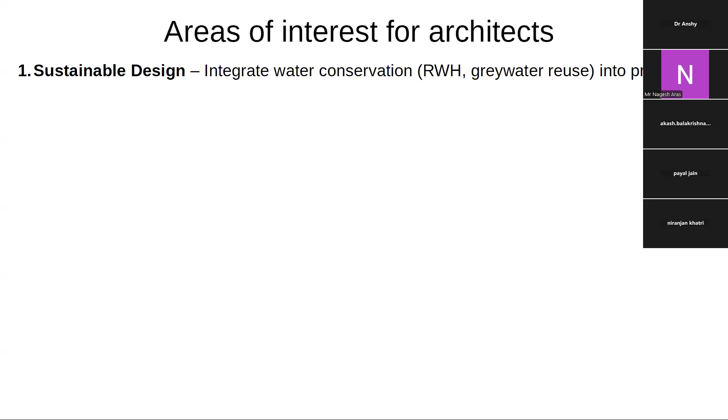The first thing we are going to talk about is sustainable design. That is, integrating water conservation, rainwater harvesting, and grey water reuse into new projects—building projects or built environment projects. I do not know whether chemical engineers get that type of chance in the professional field, but it's something to think about.

Another one is urban resilience, that is, planning buildings and cities to handle floods, droughts, and climate risks.

Third is policy awareness—this certainly applies to everybody—understanding water laws shaping construction and infrastructure. Fourth is systems thinking: linking architecture with engineering, ecology, and governance.

Fifth is community focus. This also applies to chemical engineers, and that is designing with local water needs and stakeholder inputs. There are about 13, 14 stakeholders. We'll see who they are, and we have to keep them in the picture. So when we as engineers think about solutions, those solutions may not be acceptable to one or more stakeholder categories. So we have to take them on board, sell the idea, and make that work along with the community.

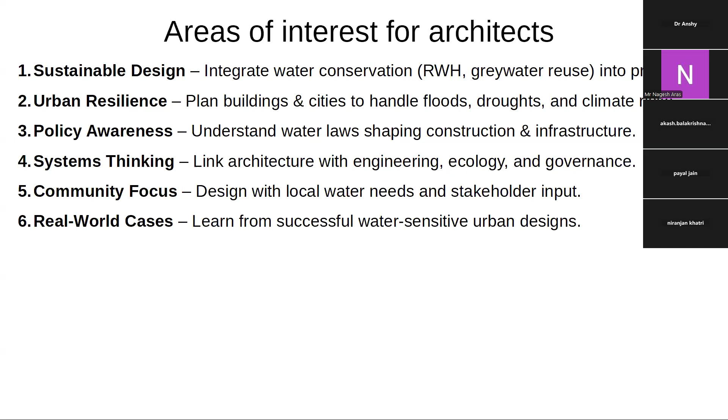And the last point is real world cases—learning from whatever is going on around the world as successful water sensitive urban designs. So this was my plan to run. Let us see how we can change it as the need arises.

So first we see water sustainability at the city level. What do we mean by that?

First point is stormwater and flood management. Both are different—stormwater is normal water disposal, and flood management means there are floodplains in any natural terrain, and we have to deal with those floods. So runoff water we have to handle, along with flood prevention and mitigation. Third point is large scale retention and detention systems.

That also becomes one of the topics—sustainable drainage system deployment. Okay, so this is one of the agendas of what we have to do in stormwater and flood management.

Then water quality and ecosystem health—I believe this audience particularly may be interested in this topic more. That is water quality improvement via bioremediation or even chemical remediation, constructed wetlands, natural wetlands, and bioretention systems, and biodiversity enhancement via water ecosystems.

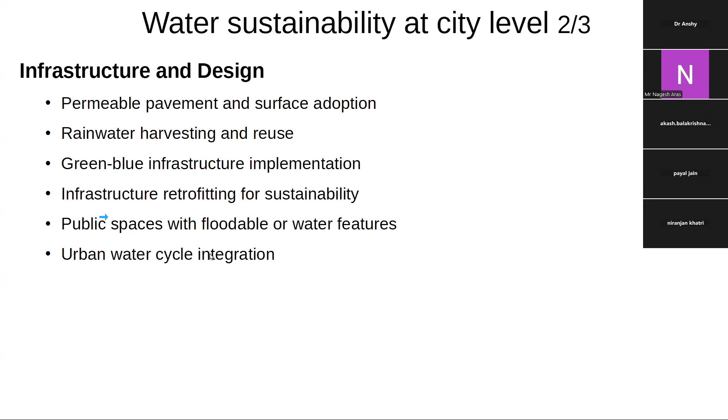That means some parks are designed intentionally lower than the surrounding areas so that they can be flooded during a flood situation, but the park will not be damaged because of that. That is called a floodable park. And urban water cycle integration.

And finally, climate and environmental adaptation. Our city is participating in a multinational initiative on climate change, so we can play a part in that. Although the city administration has not invited public participation, we can take initiative and get involved. So one thing is urban heat island mitigation through water features.

Just an aside—IISc conducted an experiment where they flew drones across Bangalore in different directions, and they found that wherever there are lakes, the temperature actually drops up to 5 degrees Celsius. So this is the impact of water bodies, and that's what we're talking about with climate adaptation and resilience planning.

And finally, policy, planning and community—that is water sensitive urban design frameworks, policy driven water absorption initiatives, and integration of water with urban planning. Because right now we do not have an urban plan in the sense of a land use plan or land use policy. So we should be talking about a land use policy which treats water bodies as core elements that we have to protect and respect. I will come to that in a later part of the presentation.

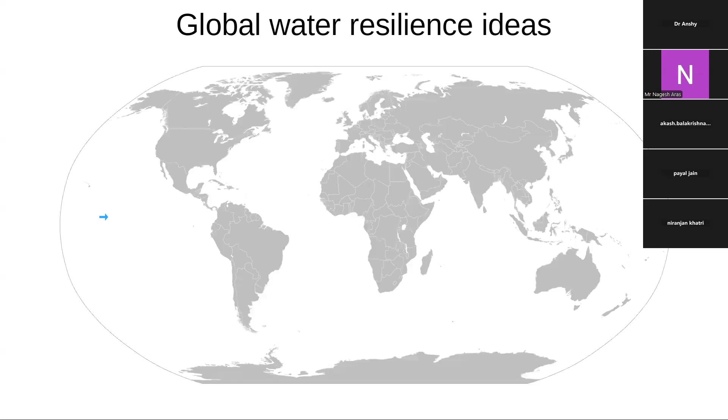Globally, there are multiple ideas. One is in the US and North America, that is US and Canada, called LID - we'll come to the full form. Here in Europe, there is SUDS, water sensitive urban design, and green and blue infrastructure. In China, there is the idea of sponge city. And in Australia, again the WSUD, which is common between Europe and Australia.

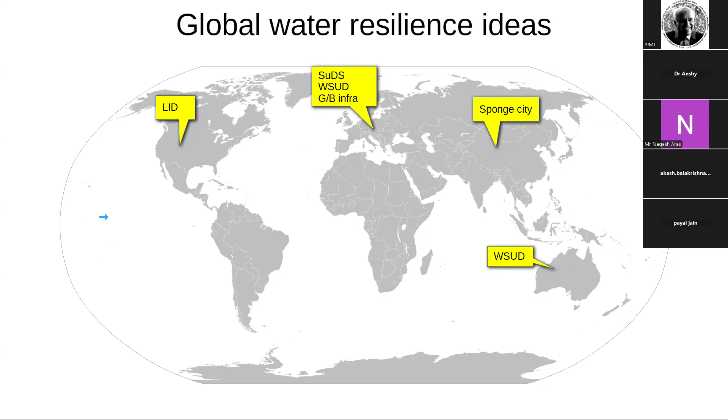These are the main ideas going around the world. I will give an overview of these ideas, what they are, and a comparative analysis. Then I will talk about what is happening in India and in Indian cities in particular.

First of all, we have to see how these water resilience approaches operate vis-a-vis scale. I will list the approach and compare them at different scales. The scale ranges from plot to locality to city to region to country.

Now, what are the design elements which actually go into these approaches? There are many overlaps, but let us see what design elements go into that. I will talk about each design element.

We categorize them into infiltration, that means water taken to the ground; retention, that means water is held for a certain time before letting it go; vegetation based, where vegetation is allowed to grow; and storage of water or ecological enhancement of lakes and other water bodies. These are the categories.

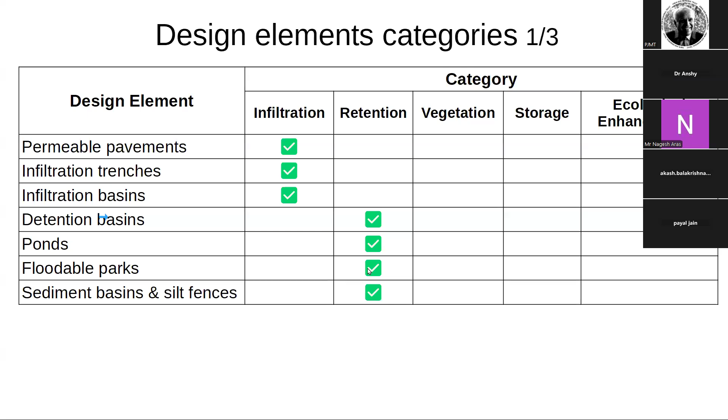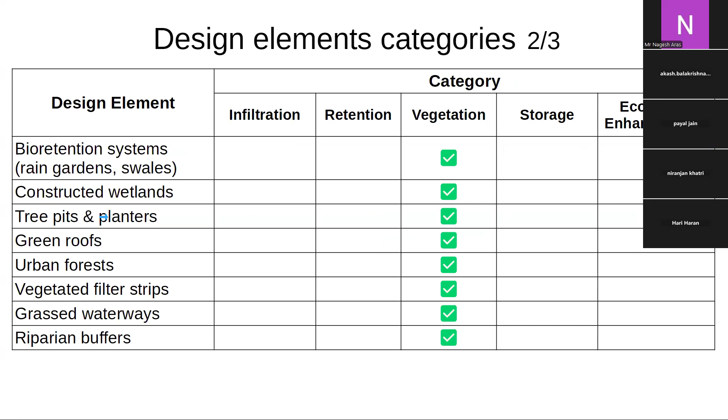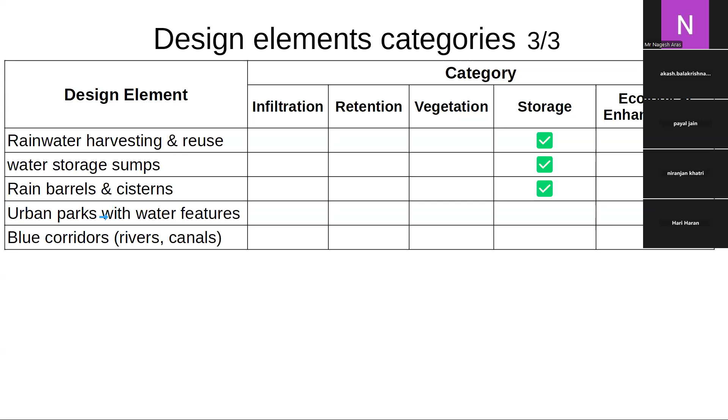The third category is storage and ecological enhancement. Storage is rainwater harvesting and reuse, water storage sumps, rain barrels and cisterns. Urban parks with water features and blue corridors - that is rivers, canals, drains, major rajakaluves - all that goes into ecological enhancement. So these are the categories of different elements used in the initiatives we talked about.

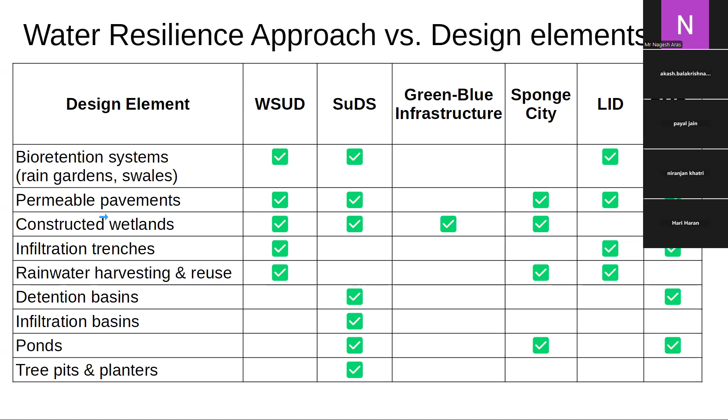I will not be talking about the details because the audience is chemical engineers, not architects, so I will skip the details about this.

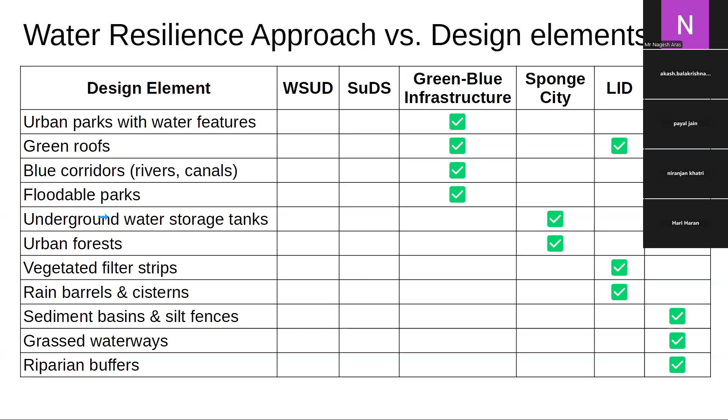Now we talk about water resilience in Indian cities, because we are not following any of those approaches per se. We have our own method, or rather it is in the nascent stage. So we have to talk about setting up these approaches and following our own method, which resonates with our people, our cultures, and our cities, whatever unique needs we have.

The outline of this part is: we will first define the water system as applicable to a city, then talk about problems in our water system, then root causes of these problems, then solutions, and finally the required governance system.

Finding solutions and talking about solutions is not enough. We need a governance system which involves both the government and the public. Together we run the system, we cooperate - government and public. Public also involves businesses, industries, everybody. And then we maintain that system. So that is the basic idea about it.

So the first part is to define the water system as applicable to Indian cities. We talk about water system assets. So far, nobody talked about assets because it was not thought about as different assets. So what are the different assets which are components of our water infrastructure in the city?

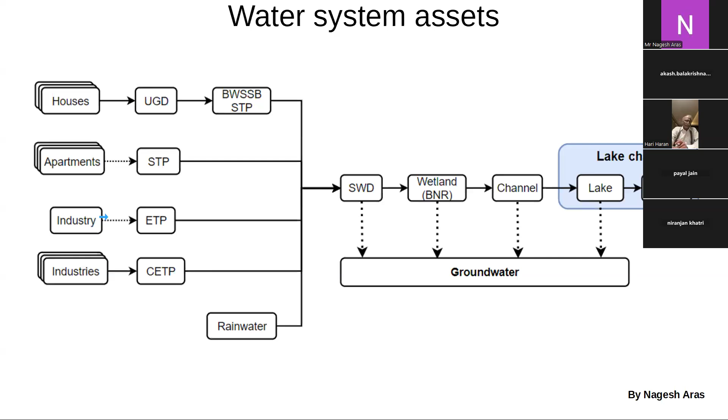No, sir, no comments at this stage. Yeah, please carry on. It's very interesting. Okay, thanks. Go ahead then.

So, coming to lakes. Why are we talking about lakes? This was primarily based on Bangalore, because in Bangalore we have many lakes and we do not have a river. But in cities like Mumbai, Chennai, and other places, there are only one or two rivers in the city, and the remaining city also has lakes. So it is relevant to talk about lakes in a separate category.

Lakes can be controlled and looked after by the surrounding community. They have different dynamics compared to a river, which primarily flows through the city, coming from outside and going outside the city. So it is not seen as a complete asset belonging to the city itself. There is less public support in controlling the health of a river compared to a lake, which is seen as a local asset or local property. I will just highlight this; you may apply it to rivers also, but this is the focus here.

Traditionally, a lake was seen as a single unit. We normally take a lake as just a lake—what is there to see? But there are almost 36 or 39 different assets in a lake, which can be divided into 3 specific zones.

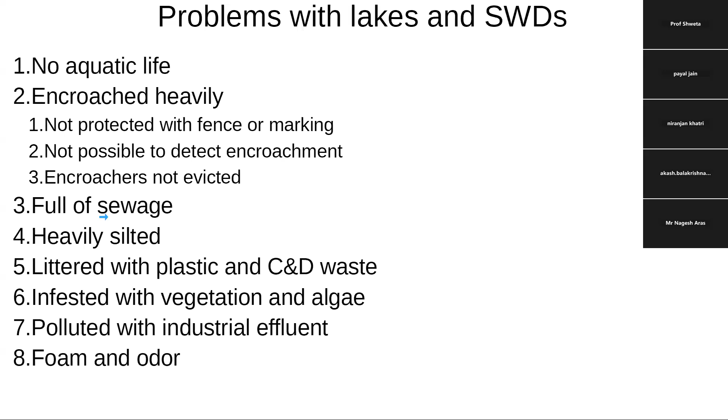Foam and odor problem, because again this is a secondary problem related to the previous issues. So these are the problems.

And the problem with the water system management is that a lot of money is wasted with no outcome, because every year we hear that the government is declaring 5 crores, 10 crores, 15 crores per lake and things like that, but we don't see any outcome.

All stakeholders are unhappy because none of them are being involved. Stakeholder needs are not met, let alone balanced. The balancing and removal of conflict and all that basically is not done.

No response to individual complaints. No response to CSR donation offers, because there are people who are ready to donate, but they are not taken up by the lake authorities.

No clarity about budget. How much budget is allocated and how much is spent out of it, that clarity is not there, so we can't talk about what happened. No clarity about long-term or annual goals.

For example, in Bangalore, every month the Karnataka State Pollution Control Board declares the categories to which each lake belongs. That scale is from A to E, where A is the best quality water and E is the worst quality water, and the categorization is declared every month by KSPCB. The situation is that there are no A, B, or C category lakes in Bangalore at all. Of all the lakes, two-thirds belong to the D category and one-third belongs to the E category. So it's like the last two categories dominate the lake health assessment.

So number one factor is the solid waste management service is either missing or poor around this lake. So what happens? The garbage actually lands up in the lake ultimately.

Second factor is lack of tertiary treatment of the treated sewage, either because the STP is not working properly or it is not there at all. Same thing, lack of STP and malfunctioning STP. Lack of effluent treatment plant in case of industries, and no protection against erosion.

And there is one more factor contributing to the so-called silt, which is human excreta. There is a solid component in human excreta, and it gradually goes into the lakes and settles there. So we call it silt, but in the city environment there is hardly any erodible soil. So what we get in our lakes is mostly human excreta, which goes and settles there. That is one more factor, and we do not have any protection against that, like how to trap the human excreta from traveling to lakes and settling there. So these are the root causes of water pollution.

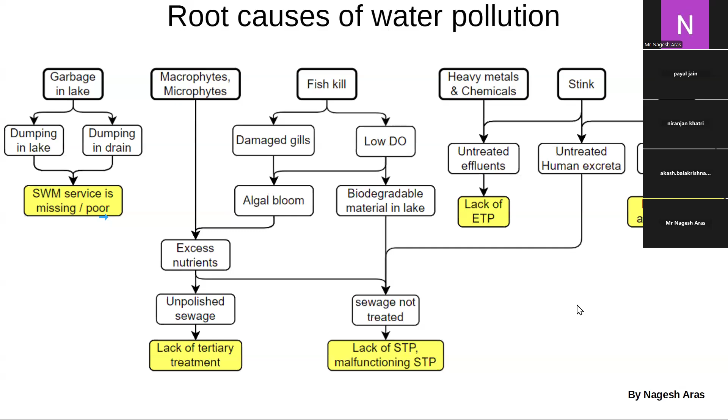Now, many lakes have disappeared. In Bangalore, 20 lakes have disappeared already. And there are other lakes earmarked as dead lakes, which the BBMP was actually thinking about handing over for real estate development. So what happens, instead of contributing to the water scenario of the city, it is actually becoming a drain for the water, or it contributes to the pollution. So from the asset side, they are switching to the liability side. That is the problem. Now, what are the root causes for that?

One is maps are not in public domain. Say Google Map, if you see, the lake boundaries are not marked in the Google Map. So if you see Google Map, you will not realize that you are standing in a lake property. So it is very easy to encroach. And if there is an encroachment, there are no evictions.

Sometimes it is because government says that these are all very low income groups, or people who are migrants and things like that. So on humanitarian grounds, the so-called humanitarian grounds, they stop eviction.

And poor urban planning. So our urban planning, our land use policy - first of all, there is no land use policy across India. No city has a land use policy. We have only land use plans. Now, how do land use plans get generated? Nobody knows. It's an ad hoc plan, right? And so in an ad hoc plan, there is no respecting of these natural assets and no working around that. No policy as to how we will respect it, what kind of buffer zones are required, and so on.

So, for example, last week, government came out with a buffer zone policy, which was roundly castigated by all the experts and activists in one voice. So this is what happens when urban planning is missing. Then for lakes going dry, there is a lack of public STP. So what happens?

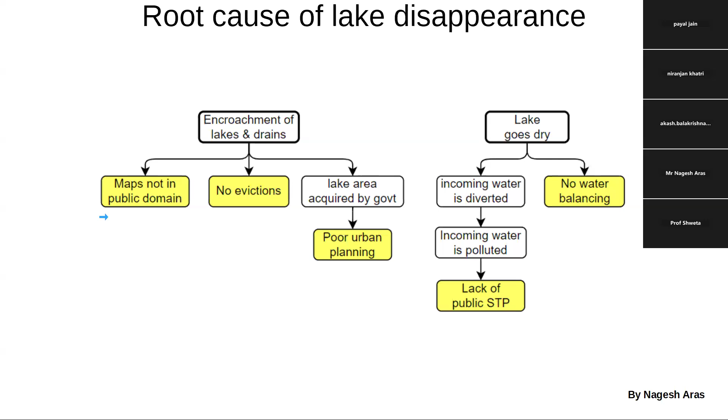Now another problem is groundwater stress. We just saw the lakes, now there is groundwater stress also. Every month, every day, Bangalore uses 700 million liters of groundwater. It extracts and uses this for daily consumption, 700 million liters per day.

And as a result, there is permanent subsidence of the ground. What happens when you take out water from the underground aquifers? The ground actually settles gradually, and this causes a lot of issues in the world.

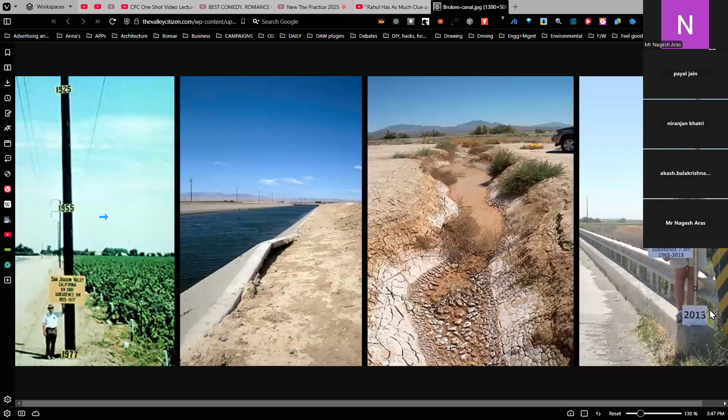In California, it is very heavy, so this is dramatically seen. Bangalore is also seeing this. Fortunately for Bangalore, our underground structure is actually rocky, so we do not see this type of catastrophe. But we are also facing that on a long-term basis.

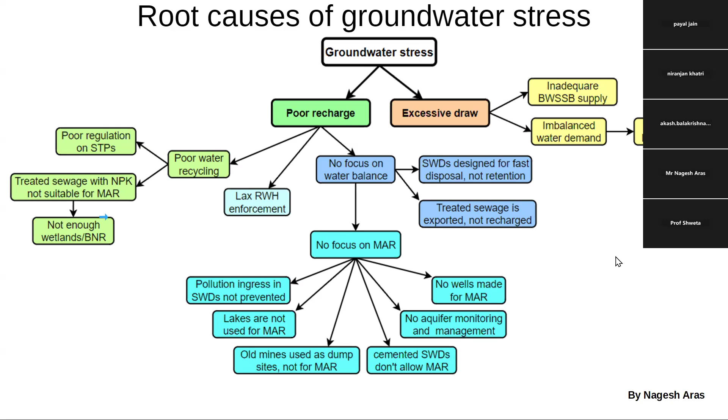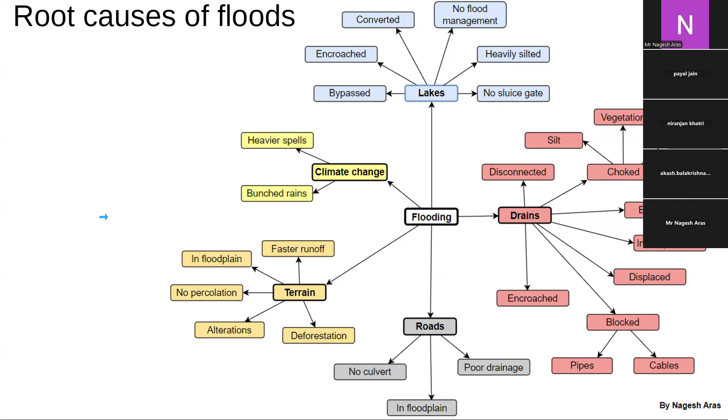Finally, the organizational failure, institutional failure, which actually plays a very vital part. We saw all these various kinds of groups, and the question comes as to why the government has not taken care of this, right? That is because of this institutional failure.

But if you look at all the agencies like BBMP, BDA, KSPCB, you name it, all these elements are missing. That is why you do not have a reliable organization which can plan and achieve all these targets, whatever function is assigned to them. And that is why we have these problems.